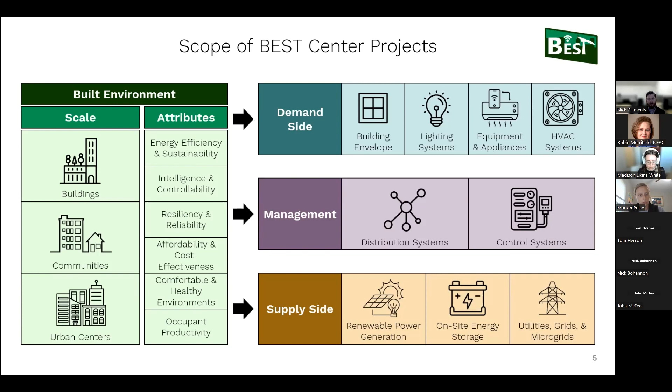As we think about those themes, they can be applied across the building typology, whether it's a building, a community, or a city. We have research looking at energy efficiency, controls, resiliency, thinking about affordability, comfort, and productivity. All those aspects of the built environment can be looked at from the demand side, thinking individual buildings and building technologies; on the management side, how do you get buildings to integrate with grids or other energy distribution systems; and then how do we get buildings or communities interacting with power generation broadly.

The BEST Center, this is kind of the breakdown of a lot of the components of it. We are in our second year currently, our second funding year. The original proposal was granted in 2021. Our phase one will go through 2026, then we'll be applying to a phase two. These centers are intended to last for a few years to build sustainability as far as industry collaboration and fees go, and then kind of be set free.

As I mentioned, we have two university sites, CU Boulder and CCNY. We have one former leadership member who moved to the University of Albany, so we're also able to tap into their capabilities. We have a website with a lot of this information available, as well as some overview slides that go into more detail. We currently have 5 full members, 2 associate members, and 7 affiliates in our industry advisory board, and I'll go into details of what that means here in a few slides.

We kind of run on an annual basis. Projects usually begin funding in the fall, that's when projects agreed upon in the prior funding year kick off, and then we start the process of thinking about the next funding cycle. In the fall, our industry advisory board and our faculty meet to talk about themes or research topics for the next year.

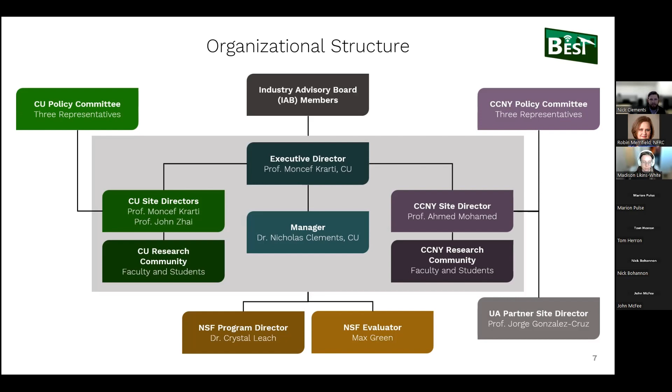Organizationally, we have representation from both CU and CCNY as far as directors go. I manage this, so I'm kind of the link between a lot of the components. NSF is pretty heavily involved in evaluating and making sure we're on track as far as the number of members we have. And our industry advisory board is involved heavily in how we operate the center, what they need to know about, and how we get their ideas. So it's pretty interactive with our industry partners.

As far as the faculty and research capabilities within the center, these are the 6 CU Boulder faculty currently engaged. The site director, or executive director of the research center, is Moncef Krarti, and he's heavily involved in a lot of retrofit technologies, thinking about electrical integration or HVAC integration with retrofits, as well as large-scale energy efficiency programs.

John Zhai is in a similar research field to my own, thinking about air quality, but also heavily involved in research on fenestration and windows. So he's the PI on the project Madison will be talking about.

Kyri Baker is very much an electrical engineering focused researcher. Gregor Henze focuses primarily on the controls side, could be anything from HVAC controls to grid integration, to how those controls impact humans in the building.

Will Srubar focuses on some cool research on biomimetic materials, so if you want your concrete to repair itself, Will's the person to go to. And then Michael McGehee has some interesting research on solar panels as well as window tinting technologies, and he's part of a startup called Tynt that has been involved in the center.

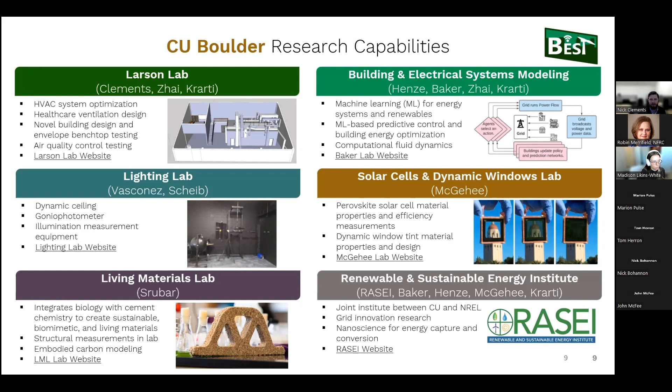On the CCNY side, Ahmed Mohamed is really focused on energy systems and critical infrastructure research—how do you keep electrical grids running in the face of natural disasters, for example. Jorge and Prathap both work on energy systems as well as atmospheric research on a city scale. And so does Mark Arend.

We also have good connections with the CUNY Building Performance Lab, with Hannah Berk, Michael Bobker, and Duncan Prahl. They've done great research looking at how to manage energy systems within a large city like New York City.

So these are a few of the research capabilities on the CCNY side. I mentioned the Building Performance Lab, BPL—they do quite a lot of work with the New York City Department of Citywide Administrative Services, and have quite a bit of capability analyzing city-level energy efficiency programs.

Ahmed's Smart Grid Interdependencies Lab is really focused on smart distribution of electricity and thinking about resiliency topics. We also have the Coastal Urban Environmental Research Group with Jorge, which has done quite a bit of work looking at satellite data and using remote sensing capabilities to manage a grid.

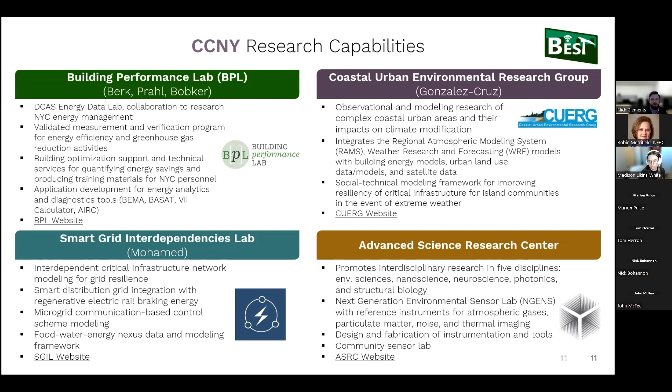So our Industry Advisory Board—the role of the IAB in the center is listed here. They're heavily involved in strategic planning: who do we need to reach out to, who do we need to bring into the Industry Advisory Board as far as companies and organizations.

They vote biannually on what's going to be funded and what goes into the proposals. They also act as mentors on projects—we try to make sure at least one Industry Advisory Board member is attached to each project, primarily to help define scope initially, define deliverables, and mentor the graduate students working on these projects. It also offers the opportunity to build collaboration and potentially hire the researchers at the end of their tenure.

We have a chair and vice chair. Sasheen from Rheem came in as our chair last year, and Sylvia came in as our vice chair. Sylvia will be giving a keynote at our upcoming Industry Advisory Board meeting, talking about the efforts in New York City towards decarbonization. She's from Con Edison.

These are our current members. We have a couple of members from the fenestration world, Cardinal and Alpen, both involved with our Windows research. We have quite a few other groups too, and in a few slides I'll talk about the categories all these groups currently fall into.

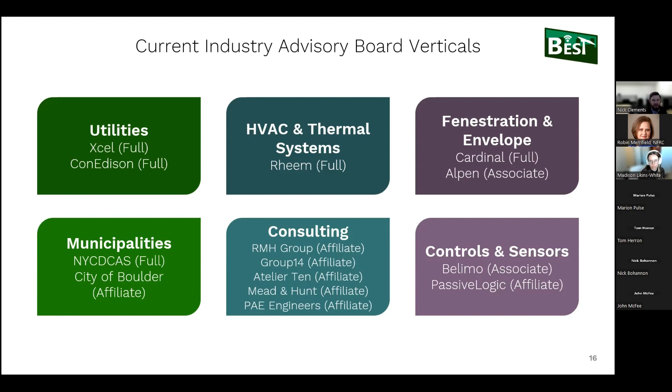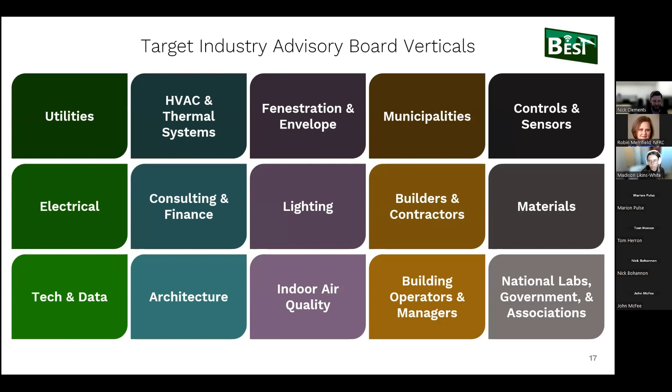I'll wrap up by introducing a few of the projects that were funded last year, and then introduce a few of the projects this year. So Madison will be presenting this first project, Evaluation of Field Methods for Assessment of Architectural Window Degradation. As I mentioned, this is a collaboration with NREL, with Rob Tenent there, and John Zhai here at CU as the PI.

We also have quite a few projects centered around heat pumps. This next one is a research project for modeling heat pumps. Number 3 here is a building performance lab project from last year, focused on modeling and trying to understand how you analyze a large portfolio of buildings. Our municipalities and utilities are very interested in this type of capability.

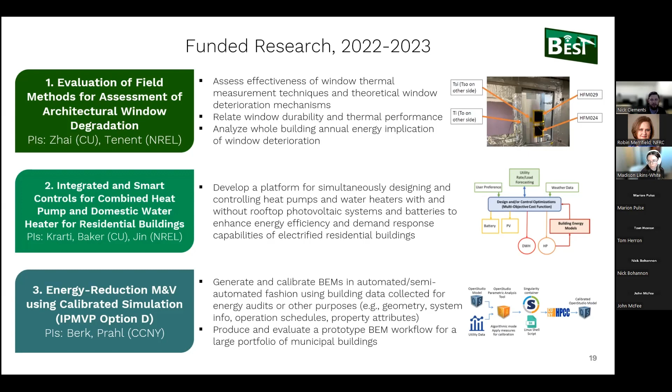The other 3 projects funded last year: the first is a remote sensing type capability using satellite data to understand energy use in a city. Number 5 is a building retrofit project, thinking about how you use insulated panels that you can attach to the outside wall of a building to add insulation when needed. And the last one is a controls project using reinforcement learning to inform controls.

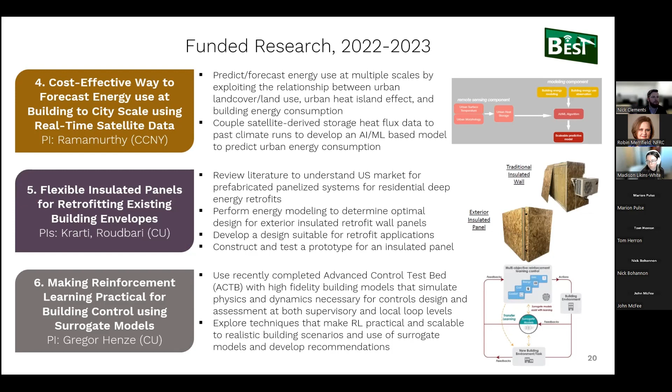A couple of these projects have continued to be funded. Madison's project, Evaluation of Field Methods for Assessment of Architectural Window Degradation, was awarded a second year of funding, so it will continue for another year. The other project funded this year is the evaluation of hygrothermal and energy efficiency and condensation risk of secondary windows. This is a project that's just kicking off that may be of interest to this group.

A couple others I'll point out, we do have a couple of heat pump projects. And Gregor's project from last year on reinforcement learning is going to go for a second year, but it's going to think about how you include human feedback in these control systems.

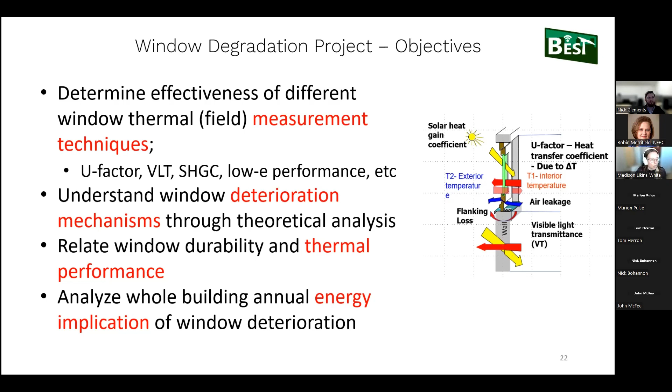So basically the first step that we did was this heat flux meter method recreation that we did in the lab at NREL.

We used the differential thermal cycling unit that basically acted as our outdoor air condition. We were able to control it to any temperature we want, and also any sort of relative humidity as well.

So we got these IGU samples and decided to look at our two extremes. The table here shows we had 4 different samples representing basically a brand new window, so it had a low-E coating, argon fill, and the other glass was just clear. Then we wanted to take a look at that same window but with no argon fill, and also that same window with no low-E coating.

So essentially the low-E argon fill represents a brand new installed window, whereas the clear air fill is going to represent a degraded window in that sense.

Definitely representing extremes, but the goal of this heat flux meter method in the lab was to see if it was sensitive enough to help us detect changes in U factor due to changes in low-E coating or gas fill. Because if we put in these extreme examples in this lab setting where everything's perfect and still can't get these measurements sensitive enough, then there's no point in going out in the field and attempting it.

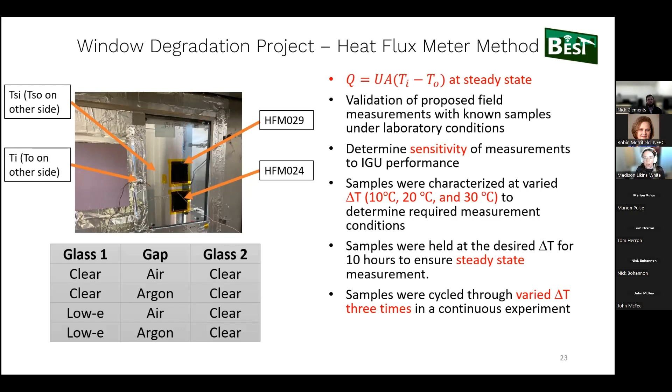So I have some graphs here, and again, lots of data we can dig into if we have the time, or if questions come up, but I really want to go over what the key conclusions were from this.

Essentially we found that the percent error for at least these two samples we have up here, our low-E argon coating and low-E air, we found a percent error from our measured U factor to the known U factor ranging from about -2% to -10%.

Okay, so we found that actually this lower temperature differential gave us higher accuracy, or lower percent error, which wasn't really expected. I was thinking the opposite - if we had a bigger temperature differential, then we'd have more accuracy, but we found the opposite. This gave us insight into how different temperature differentials affected our results. We found that these extreme conditions that ISO 9869 recommends, wanting a bigger temperature differential, maybe that's not as necessary as we thought.

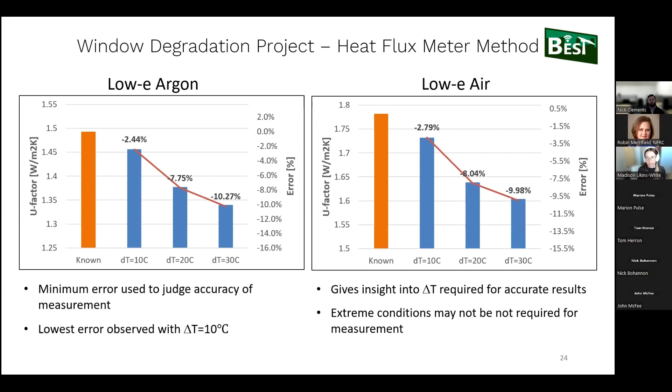Moving on to our other samples, we found this percent error still around 2% to about -8.6%. Essentially what this told us was that for any changes in gas fill, the percent error was higher than our percent difference in U factor. We know how much the U factor should have changed going from full argon fill to no argon fill, and that percent difference was maybe 4 or 5, but our error was higher than that. So if we went into the field and tested and got a U factor lower or higher than expected, we wouldn't be able to confidently say that's due to a loss of gas fill. It could just be the error in this measurement technique.

We did find, however, that with low-E coating, the percent difference between having a brand new low-E coating and no low-E coating - that percent difference between those U factors was around 50%. So in that case, this method seems sensitive enough to tell us that if we had this huge difference in U factor, we might be able to say that is telling us there could be some low-E degradation in this unit we're looking at.

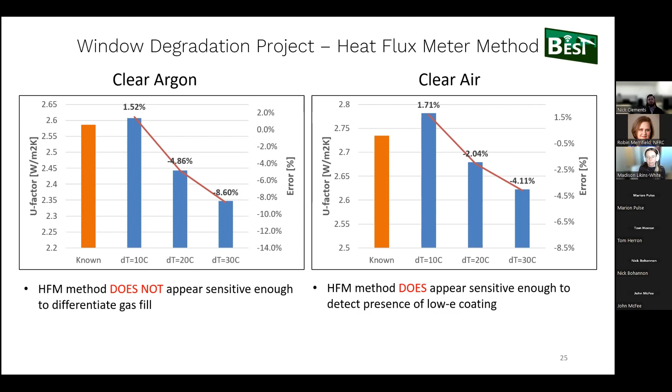So basically overall, and I'll come back to conclusions again, we found that this method alone really isn't comprehensive enough to tell us everything we want about the thermal performance or the degradation of an IG unit in the field.

So the second half of this project we've worked on so far was this simulation that we did. We just took a DOE reference building that was a medium-sized office. It's a bit of an older model we used - I looked, it's about 2004. So we definitely want to repeat this with a newer building to get one that's more representative of what's in the stock today.

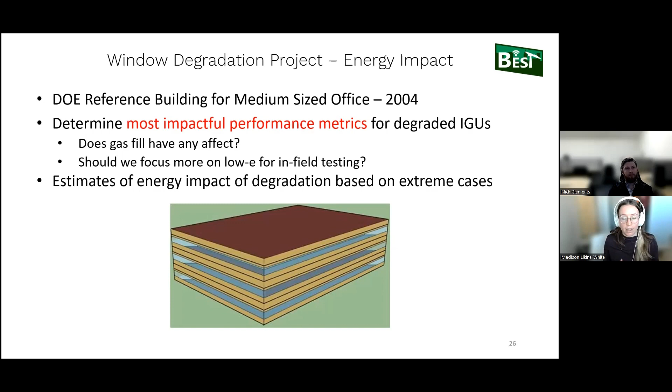But the main goal of this simulation was to really determine the most impactful performance metrics for degraded IGUs. So again, really taking a look at how much loss of gas fill in an IGU affects overall building performance, and how much effect a low-E coating has on overall performance. The goal was to give us more information about what we should focus on actually measuring when we get into the field.

So we essentially set up this simulation the same way we had our samples in the heat flux meter method. We looked at all of the windows being brand new, with low-E coating, argon fill, and then 4 different samples all the way down to what does our energy consumption look like if we just have clear windows, no gas fill.

Whereas the low-E coating was much more impactful on the overall zone loads. This told us that low-E coating is what we wanted to really zero in on. If we have to pick a few parameters to focus on, we really want to look at that low-E coating just because it had a greater impact on the overall building consumption in this simulation, and that was kind of expected as well.

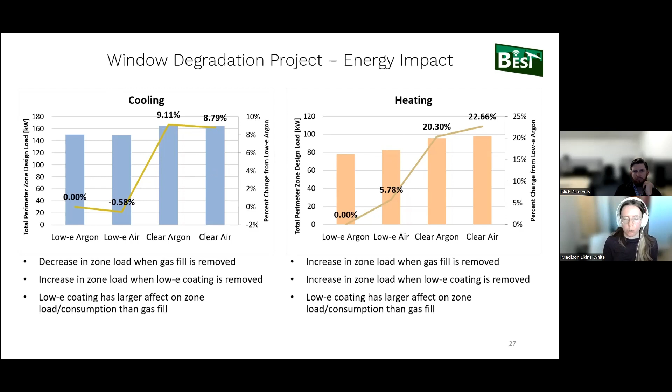In general, we kind of knew that the low E coating was going to have a bigger impact based off how much it changes the U factor compared to not having one. What I thought was interesting about this simulation, though, was that changes in U factor had a greater impact in our heating condition compared to a cooling condition. This becomes more important when we talk about what needs to be changed in different climate zones. If you're in a heating dominated climate zone, you're going to care more about gas fill than if you're in a cooling dominated climate zone.

So wrapping up those conclusions from the heat flux meter method: we found that gas fill changes really can't be detected using this method on its own, but low E coating changes maybe could. This tells us we need additional measurement techniques, looking maybe at the Sparklike device that NREL has, along with other new techniques we're thinking about adding to combine those together. So the heat flux meter method can tell us about the low E coating, but maybe the Sparklike can tell us more about the gas fill.

Our simulation conclusions confirmed that the effects of the low E coating are greater than the effects of the gas fill, and that this loss of low E coating in the glazing can trickle down to all other building components, leading to higher operating costs, with these energy changes occurring in all climate zones. I just showed results from a single climate zone, but I actually did it for all climate zones and saw essentially the same trends in each, just to varying degrees.

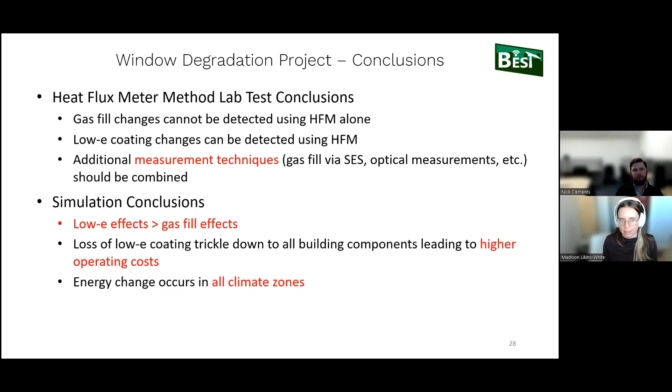Leading into future work and plans for this research, since we know the low E coating is of great importance, we want to do a small scale test on the optical properties of different low E coatings, measuring transmittance, reflectance, and emissivity with a spectrophotometer. We want to look at hard coat, soft coat, and a baseline clear sample, compare those optical properties, then put them into a chamber that's super hot and moist to deliberately degrade the low E coatings, and put them back into the spectrophotometer to get all these readings again.

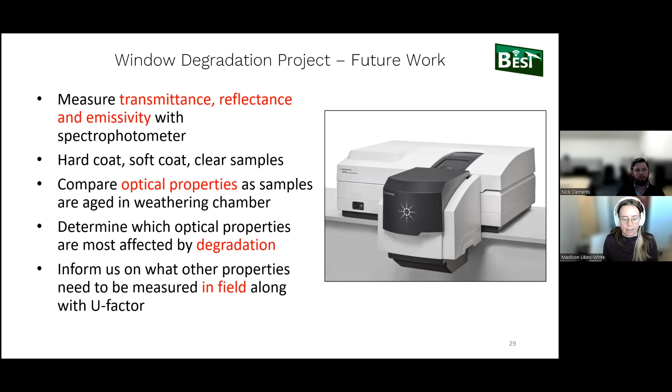We want to see which optical properties are most affected by that degradation, to inform us about what we should focus on in the field, because right now we can go into the field and measure everything, but we don't really know what's going to be most useful for us. So we want to start on a smaller scale and hone in on just a few measurement techniques to make this more reasonable and achieve the overall goals.

So that's what's up and coming right now at NREL, getting those tests going. We also have a new master's student helping identify buildings on NREL and CU campuses that would be good candidates for in-field measurements. We want a range of buildings of different ages, since we're looking at window degradation, to know what age impact has on thermal performance, as well as orientation, different types of coating, different types of gas fill, etc. He's going to look into what buildings we can access to get a good starting point to get into the field and start taking measurements.

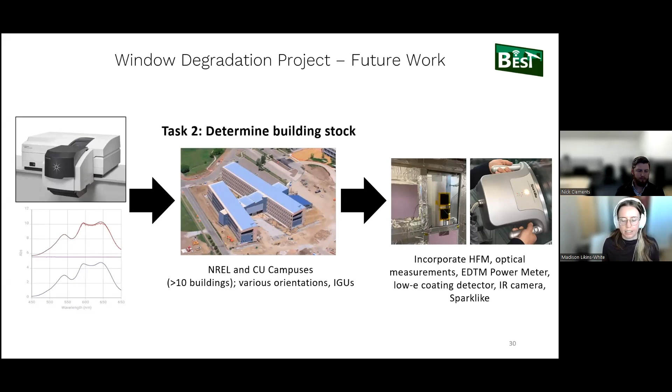Once we have those identified, we would incorporate this heat flux meter method. This is an example of a Sparklike device. We might have some new optical measurements, this EDTM power meter. We have all these other pieces of equipment we're trying to think about how to use to our benefit and get the information we want, so we can start this data analysis process to develop a correlation between degradation, like age, orientation, etc., of the window, and how that links to its actual thermal performance.

So once we have this, hopefully it won't be simple, but maybe an equation or some sort of correlation that we can put into EnergyPlus and OpenStudio, so that we can analyze those overall lifetime energy impacts for a single building.

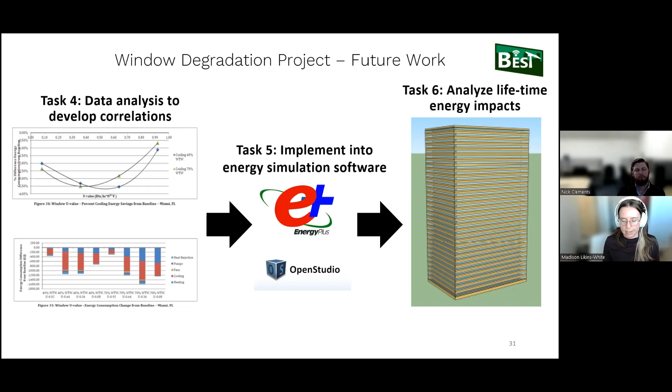And then past that, we want to do that for the entire building stock. At NREL, they have something called ComStock, which is basically building energy modeling, but for all of the commercial buildings in the US. So you want to see how the energy impact is going to change from saying our U factor is constant to saying, actually, our U factor is changing. What is that energy impact on a single building? And what is that energy impact if we apply it across all of the commercial buildings in the United States?

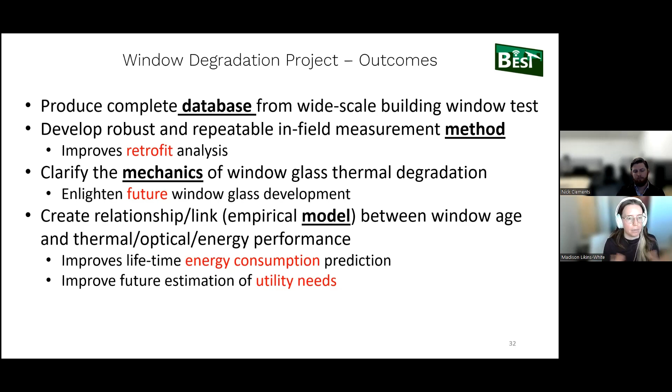So that leads into these outcomes: this database for the buildings we want to test on, developing this in-field measurement technique that can be repeatable, because we want people to use that and potentially improve retrofit analysis. Create this relationship or model that links window age and energy performance to improve our energy consumption prediction and estimation of utility needs when looking at the overall building stock of the entire country. And I believe that's my last slide, so I'll stop sharing my screen for now.

And yeah, I can take it back to you, Nick, if you want.